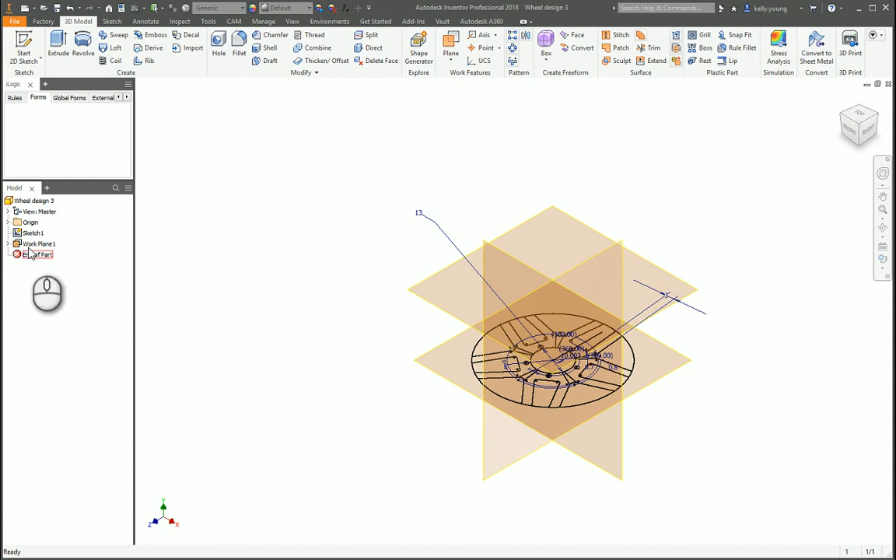Hey there, William. Looks like you're trying to get this wheel going here. Let's see what we can do for you. Turn off some of these things here and go into your sketch. Looks like you have a bunch of dimensions needed.

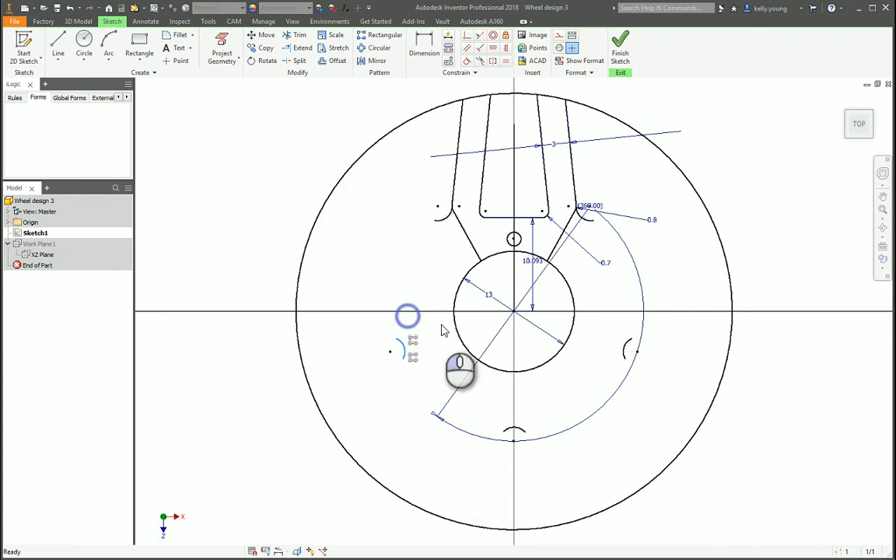So let's see what we can do. First, I'm going to delete some of these patterns here, and this is your mirrored stuff, so I'm going to delete that too.

First thing is there's degrees of freedom going all over the place. First thing, you're outside one. So one thing you want to make sure is that all your dimensions are locked in. One thing is when you hit a dimension here, it's actually showing that it's an ellipse, not a circle. So that's going to be an issue.

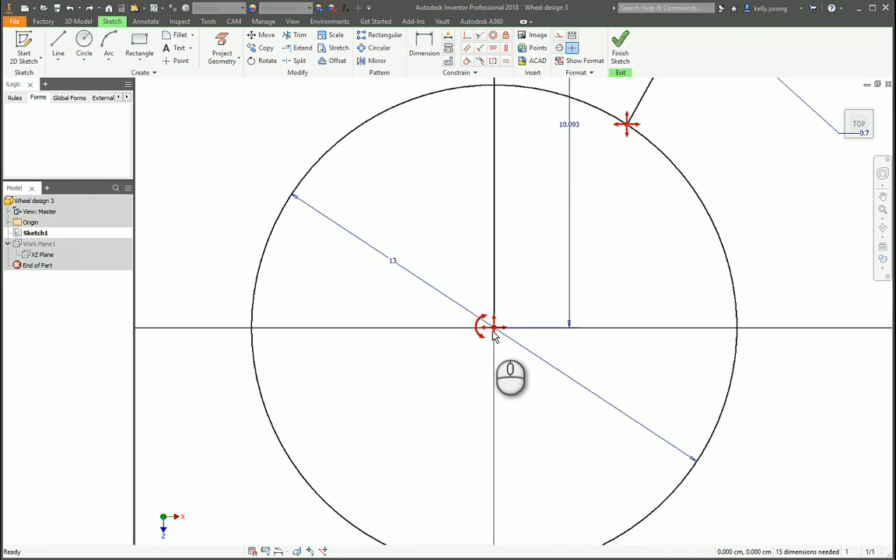Also, it's not stuck to the origin, so stick it to the origin, so that way it's locked in. So that way, if you actually move this part... let's see, we are going to extend this line out to the edge and figure out how long.

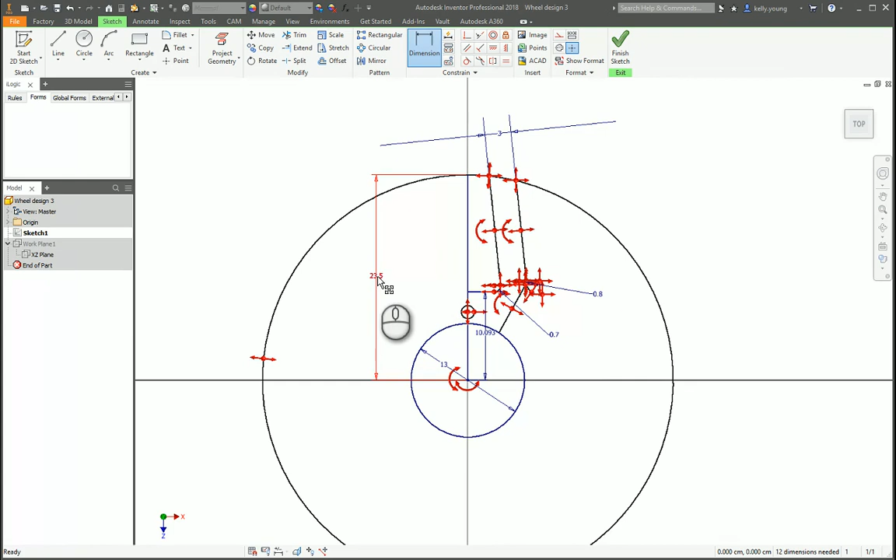Some of these dimensions are a little bit too big. Let's see. All right, so now that's a circle.

Let's make sure it's on the center point here, so that way it can't go anywhere. This can't go anywhere. Oh, that one can. All right, dimension this. You want to get in the habit of dimensioning things, so that way it's locked in and fully defined.

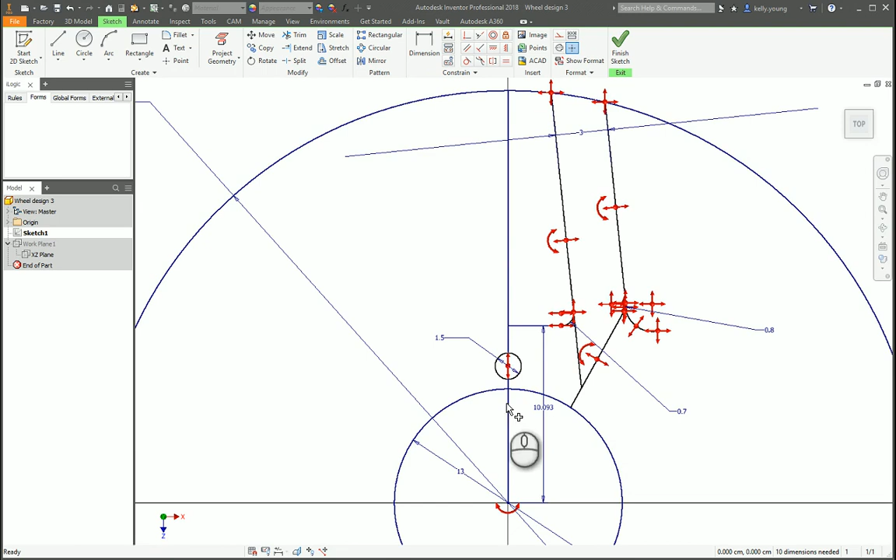Up here, we're going to extend these lines to the edge, and from the center, so 7.8. One thing I noticed is that you kind of want to have this come around, so I'm going to show you a couple of little things here that probably will help you out and see what's going on. So let's trim this up here.

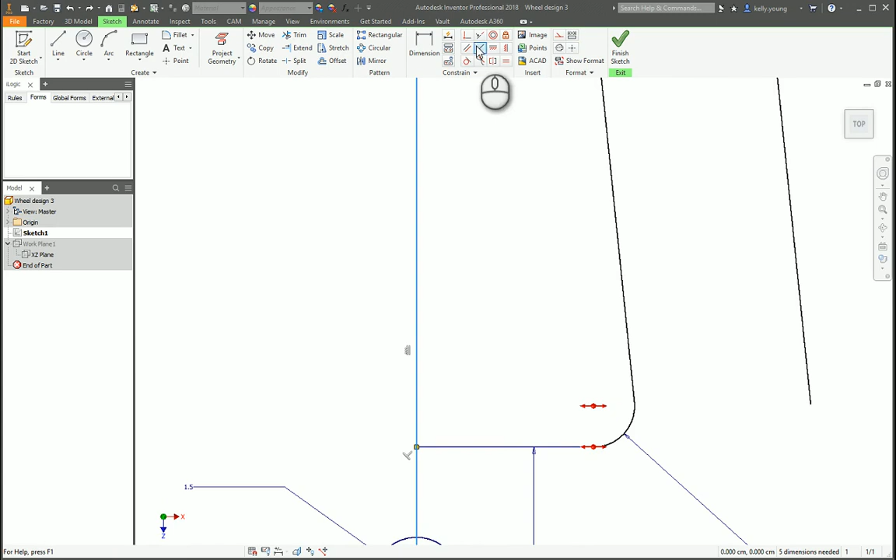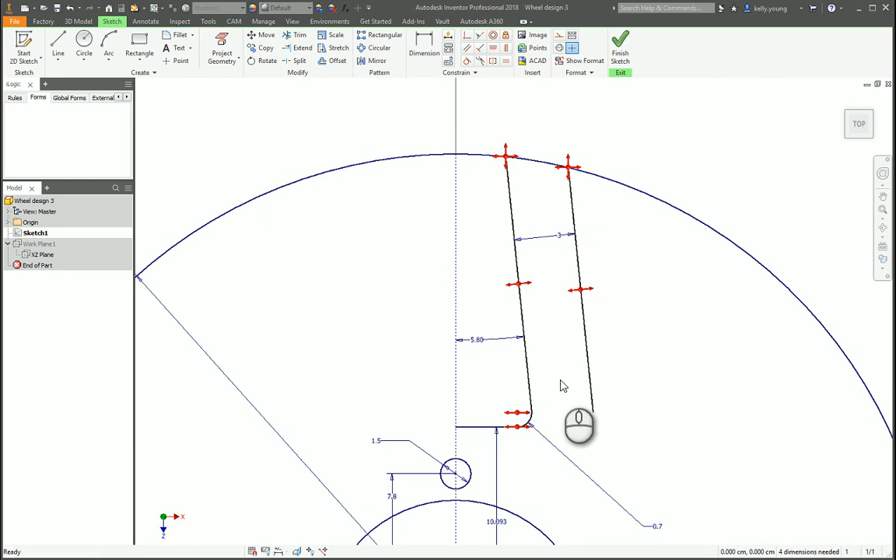Okay, so I'm going to make this a construction line and a center line. So that way, if we come to here, actually, center line. Again, make it simple. And what else are we looking for?

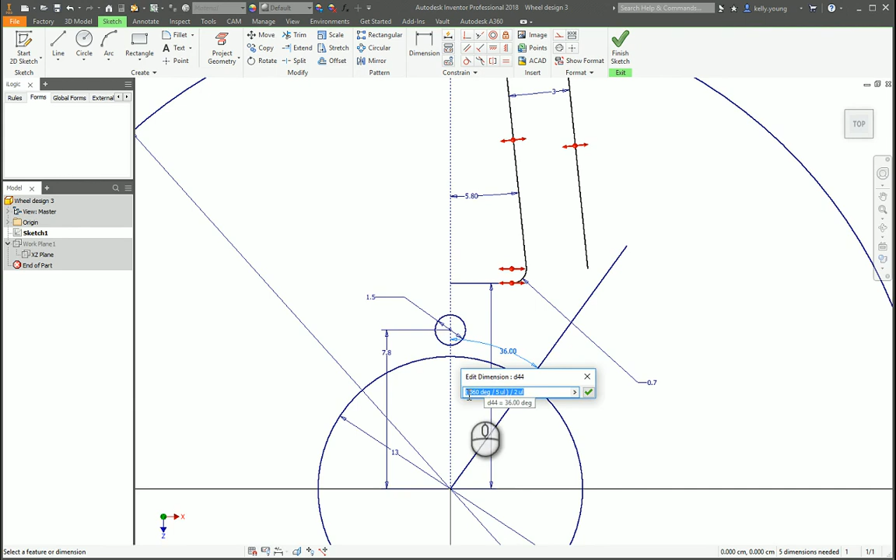Now, one thing is you want 5 parts. The reason I did this is you have 360 degrees going all the way around. You have 5 parts, and this is half of the part. So if you really wanted to, you could draw another line on this side and then go from there, but it's not really necessary.

And then you want to have this coming into here. Now we're going to do a tangent command to there. Trim that off. Draw another circle to here, and have that point on the circle, and also tangent to it. Now if we make this one, let's say 30, it'll stick to it.

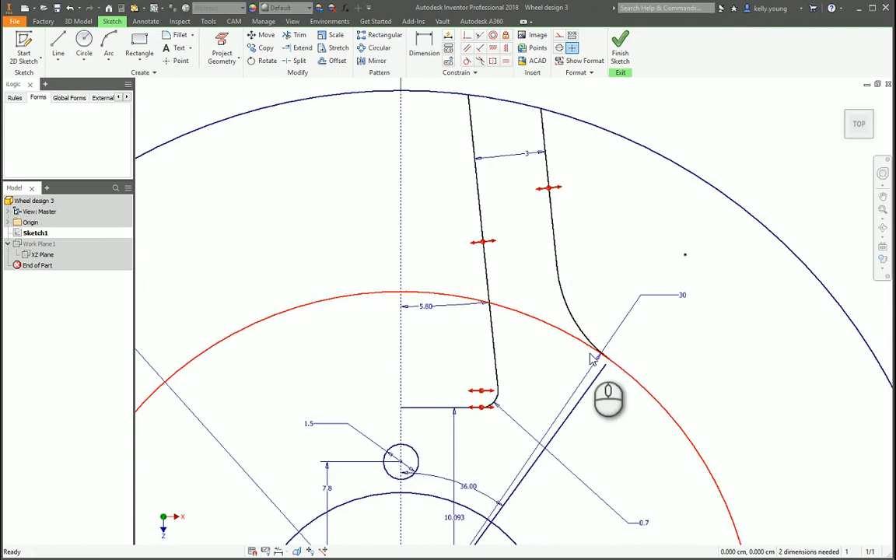Let's trim these off. And looks like that dimension there. So now we have one dimension needed. Let's figure out where it is. It's right there.

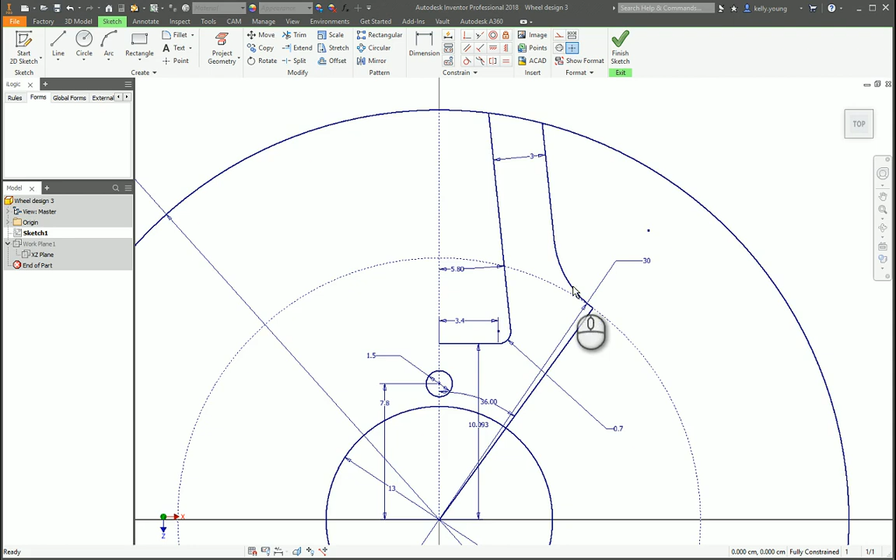Make this our construction line. Okay, so now if we change this to 28, that'll stay in line. We're going to trim to here and there, and this in line with the center point.

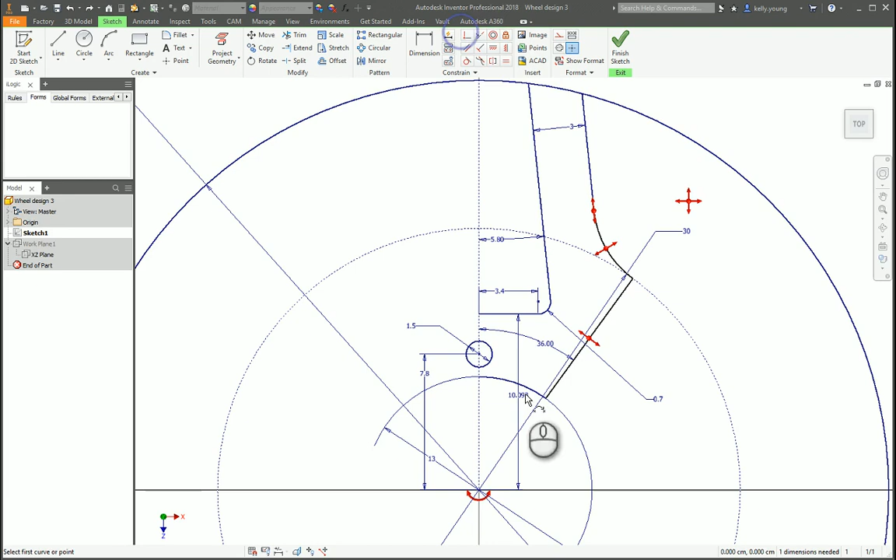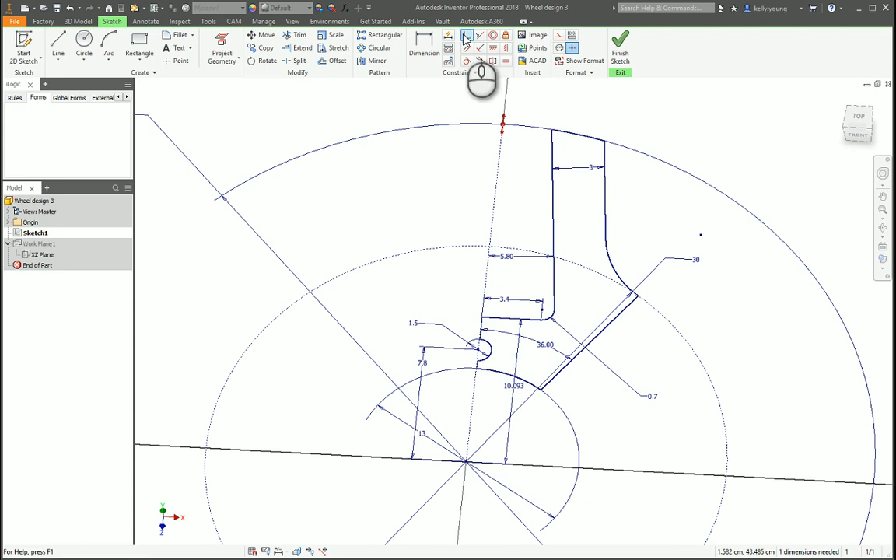So here's our little part here. It's half of it. Let's draw a line here and trim this off, and I'll show you why. And let's trim all this stuff off, and to that point to there. So now all we have, I mean, we could trim this stuff off, but you only need two. So the reason I'm going to do this is now, when I extrude it, now you have your little portion.

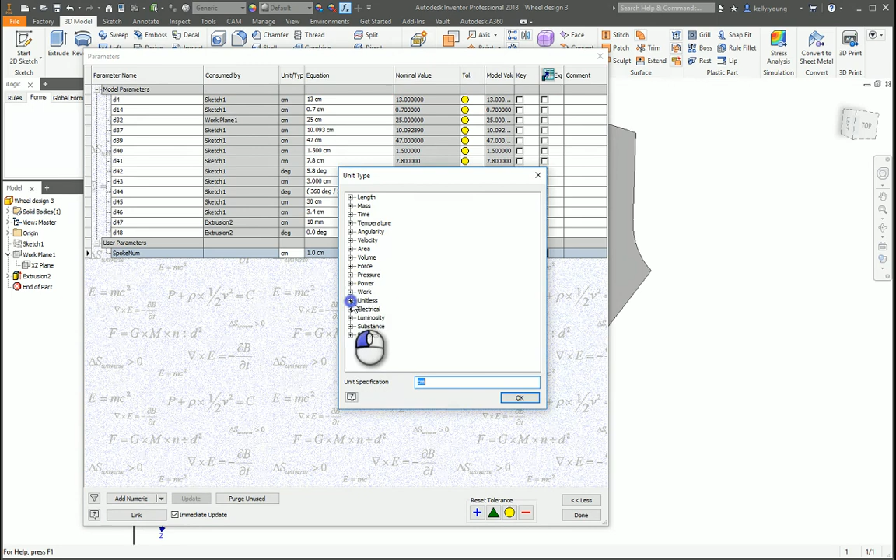I'll show you a quick little trick that I picked up back in the day. We're going to add our own thing. So call this one our spoke number. Make this a unitless command and put it at 5. So put right here, spoke number.

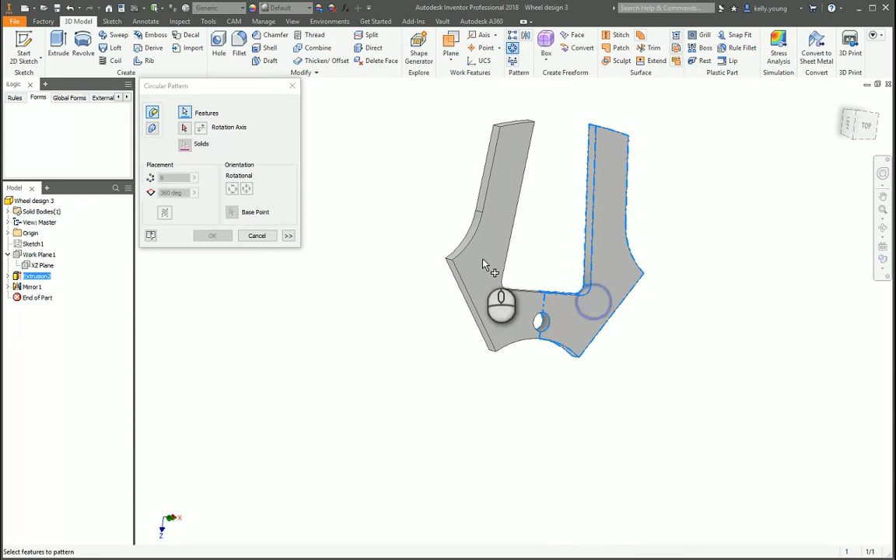So mirror this part along the mirror plane here, and then mirror rotate these around the center axis at the spoke number.

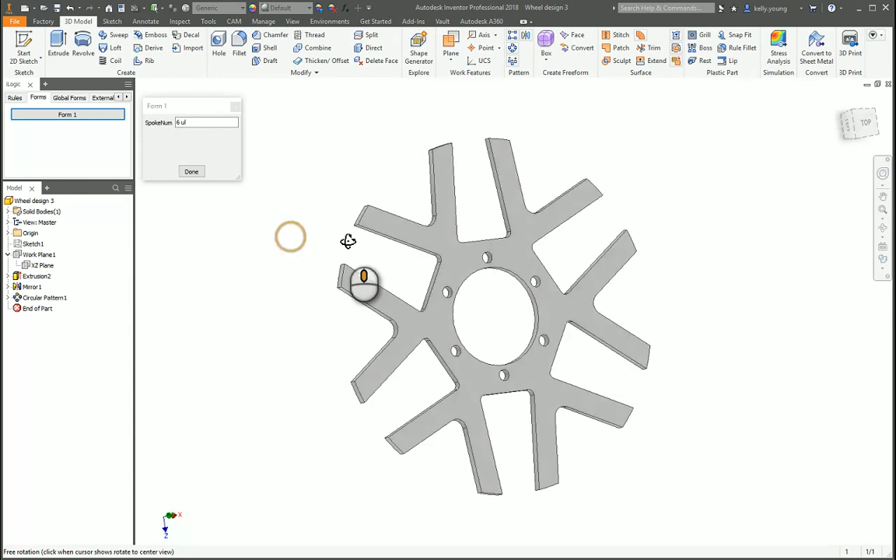We will get that. So if we make a form, put our spoke number in there, use our form to drive it to 6, it changes spoke numbers. So we can do 7. We can do, it'll probably start breaking. So you can start getting some cooler things.

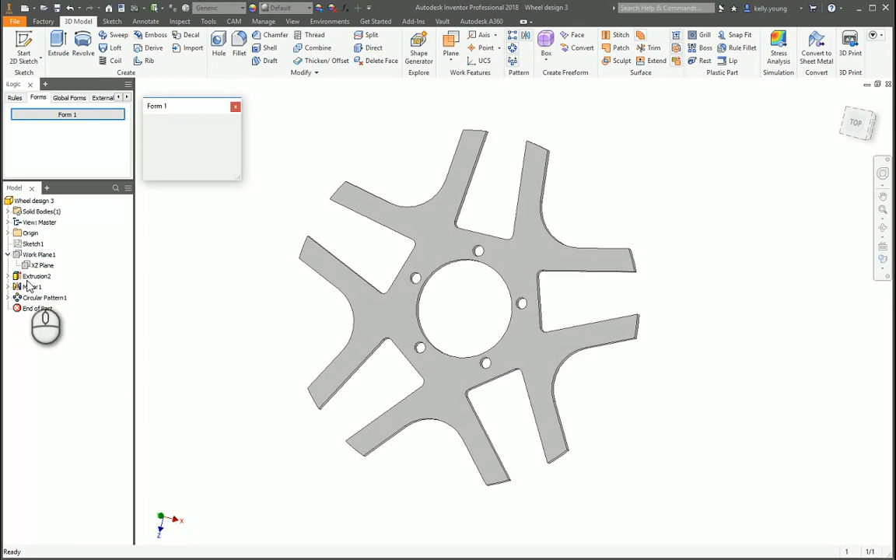So I hope that helps. So that way when you're done, if you actually come back into here, you say, okay, well now I know this is too big. I want to make this at 28, and this at 6 degrees, this at 2 degrees. You come back in, and the whole thing adjusts parametrically.

If you wanted to, let's say you turn on the visibility of this, you don't actually have to enter into the sketch. You could just enter, this dimensions from here. So let's say, let's make this one actually 10, this one to 3, that one to 2.5. What's that one? 1.7. Let's make that 1.

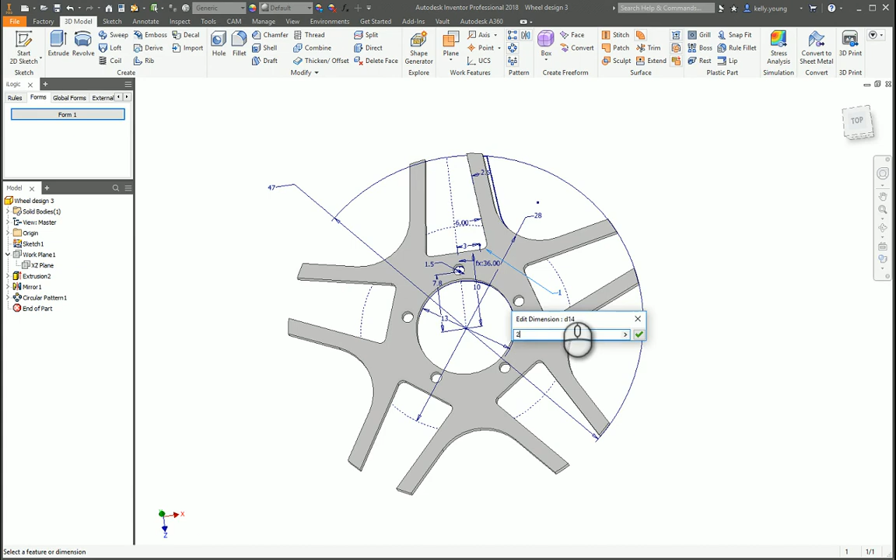Yeah, let's make it 5. Nope, just kidding, 2. Anyways, and then we can hit our update, and it'll update everything. So those are a couple of tips.

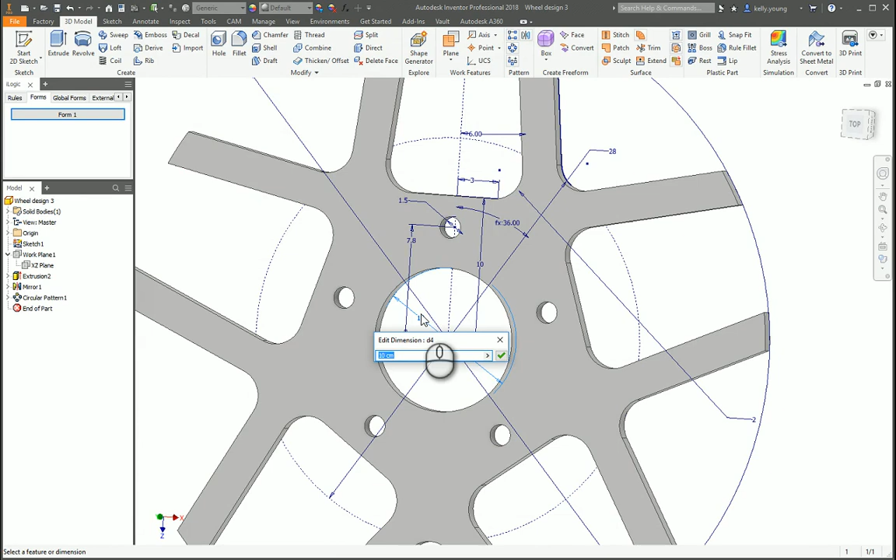Some other things here. Let's make this 10. So if you really wanted to, you could come in, go to your functions, and you could rename these things. Or if you're actually in the sketch itself, you could say center hole equals 10.

First step. So if you actually go into it, then it'll call it lug distance right there. So you can go back and rename all these things, but if you go into the form here, it'll now show up as items.

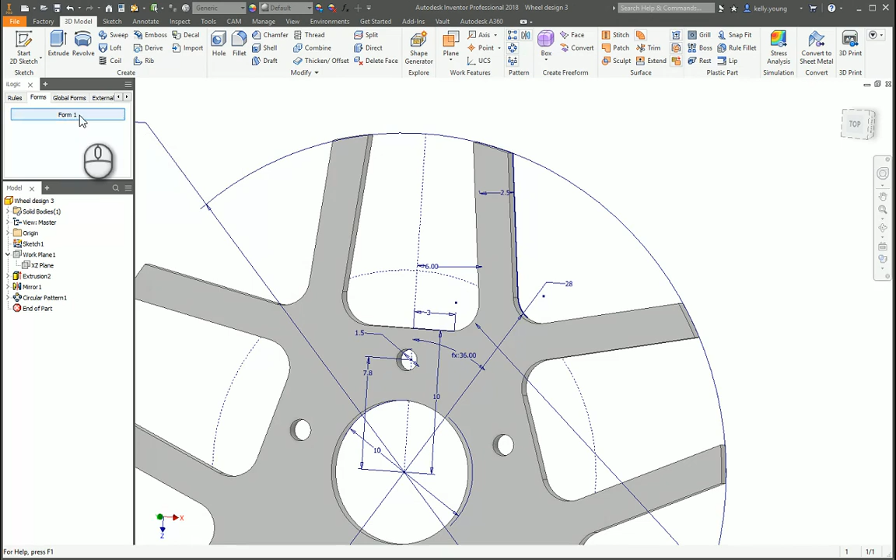So if you really wanted to, say I want my center hole to be at 9, it'll update. First step at 15. Spoke number 6. So if you get a little too crazy, it'll start breaking things, and it'll cause you problems. But I hope that helps.